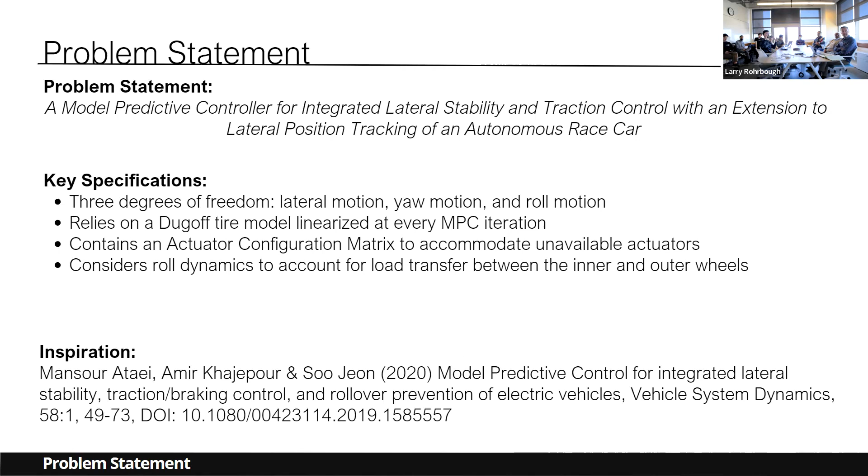Quick, before I get started, the inspiration behind this work is the paper mentioned at the bottom of the screen. In fact, it set up the backbone and then we applied the modifications that we needed for an autonomous race car and what follows.

Okay, so let me get started. First of all, why we need a controller. There are 2 cases of a vehicle not operating the way you want it to: we have a case for oversteer and a case for understeer. Understeer is when the car does not go where you want it to go because it steers less than you want it to, and oversteer is when it steers more than you want it to.

Essentially understeer is very controllable, because if you're understeering, you can hit the brakes, you can increase your steering angle, you can still, as a driver, control for it. But when a vehicle is oversteering, that's when the problems arise, because when you enter the oversteer region, it's very difficult to control the vehicle unless you're a professional race car driver. So essentially what our controller is trying to do is avoid the oversteer situations and control the understeer situations.

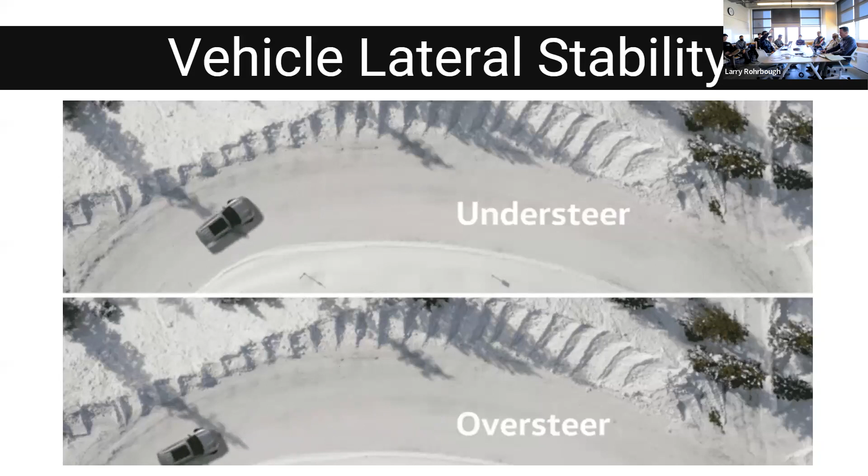In terms of literature review, the first choice is to select what kind of control scheme we're going to use, and we selected model predictive control based on 4 main reasons. The first is the need to accommodate for stability constraints.

In terms of optimal control, you could use a linear quadratic regulator. However, that would not account for keeping the vehicle within the limits of stability, so this knocked down options that cannot accommodate constraints.

The second main point is accounting for a multiple input, multiple output system. This is an autonomous racing car, a very complex system. It has all its states fed back into the system, forces, and as outputs we output steering angle. The multiple input, multiple output nature meant we cannot use conventional schemes that decouple our dynamics, such as PID control.

The third and most important point is the predictive nature of the controller, whereby based on a roughly accurate mathematical model, it can look further into the future. The time we've set is 1 or 2 seconds, and it can see if it's going to be stable at that point in time based on an input provided now. That was a very pivotal thing we were looking for.

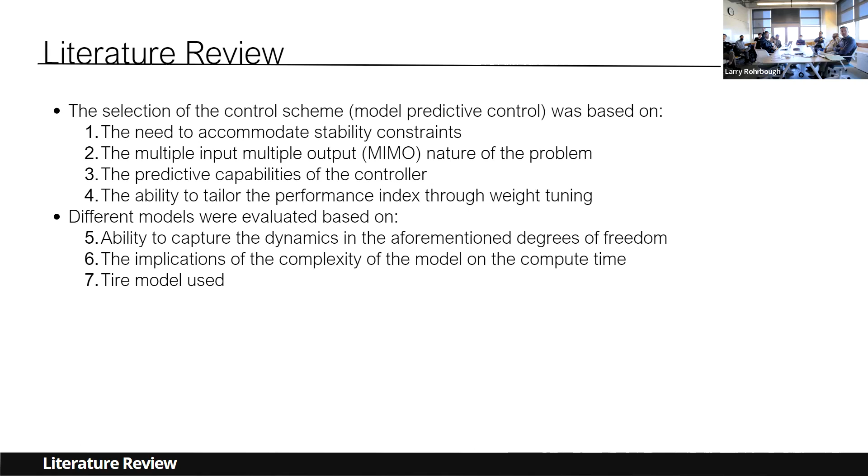Let me move into the tire model and what we ended up using. We ended up using a linearized Dugoff tire model. The main reason is if you look at the conventional Dugoff tire model, shown on the left, it captures dynamics fairly well. However, it's extremely complex, and the variable we work with, alpha, makes it extremely nonlinear.

To accommodate that problem, we linearize this model based on a hard-coded linearization function that takes us from the function on the left-hand side to a very linear, nice function of alpha on the right-hand side. We do this every 100 milliseconds, so we're not linearizing over the whole MPC horizon, but every single iteration. This accounts for the time complexity and model complexity factors of this problem.

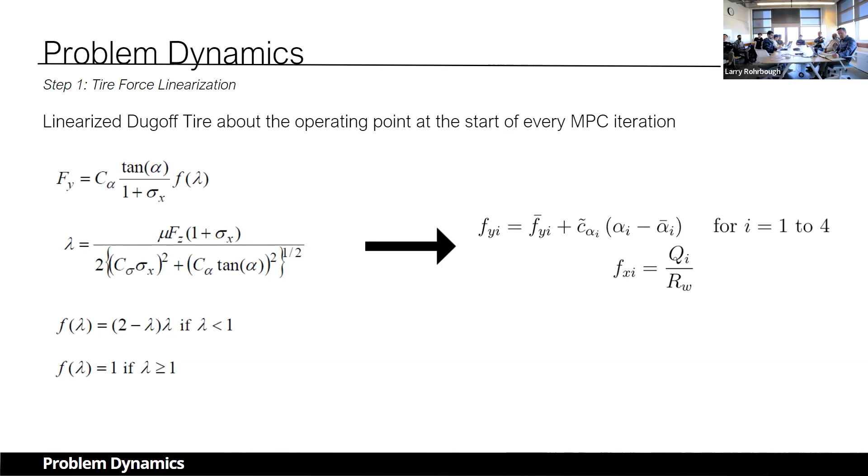That's for tire dynamics. Moving into vehicle body dynamics, these are derived from Newton's second law. It relies on in-plane motion with roll dynamics and on the stiffness and damping of the overall vehicle. The wheel dynamics are considered, as is the case for a general electric vehicle. The problem is also defined in terms of U, the change in inputs, shown as a vector at the bottom, which is the change in wheel torque and change in steering angle for every single wheel. Based on the actuator configuration matrix, we can control which of these we actually use to control the vehicle.

Ultimately, the resulting model that we get from Newton's second law is the one shown on top, where we have a state space model with input F, which are the forces in the longitudinal, the lateral, and the yaw direction.

We can also see that the model we would like to have is one where the inputs are the changes in steering angle and torque, because that's what we can actually control for. We cannot actually control for forces.

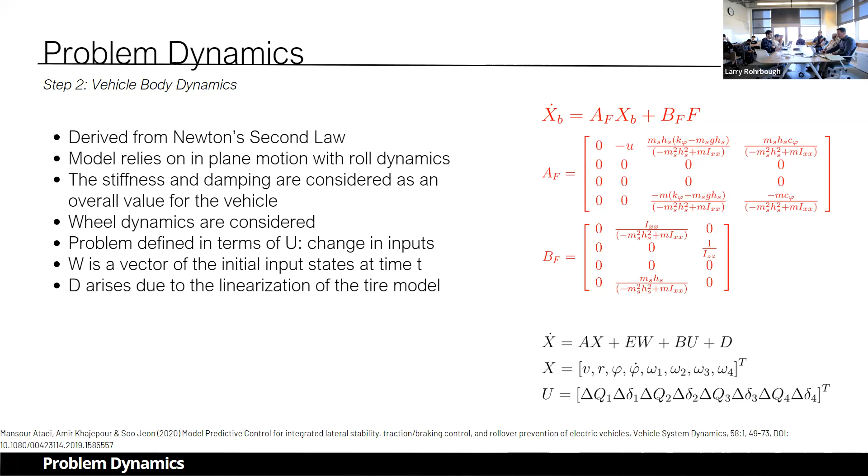So to get from the red point to the black point, we go over some math. Basically, we start with our linearized tire model, and from that we use the following equation, the relationship between the slip angle of the tire with the steering angle, the lateral velocity, and the longitudinal velocity.

a_i is defined as the distance from the center of gravity to the front axle, or the negative of the distance from the rear axle to the center of gravity, and the yaw rate. By doing this, we can move from the left-hand side to the right-hand side, where we have our tire forces in terms of our vehicle body states.

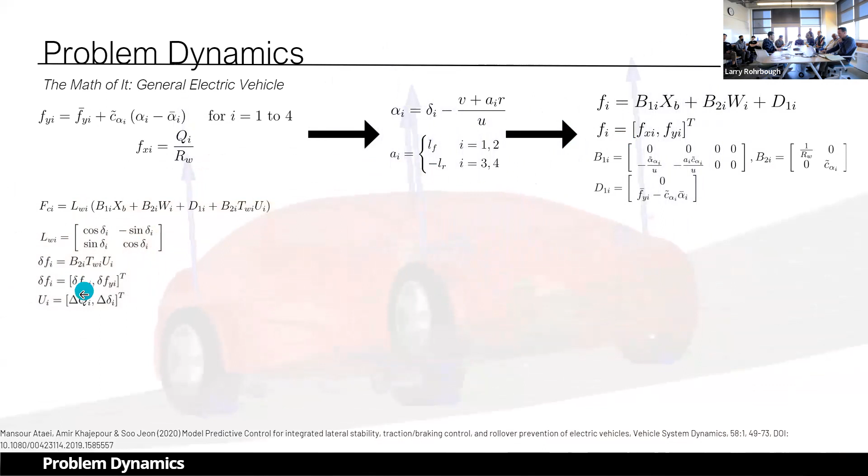After doing this, we can use a mapping matrix, LWI, which we use to move from the forces on the tire to the forces at the corners of the vehicle - essentially the rotation of the forces on the tire to the direction the vehicle is pointing in. We also add the control input as the fourth term here.

After doing this, we can take these matrices, these 2x1 vectors, and put them all on top of each other to get this simpler notation. After that, we can use the following matrix, called LC, which maps all of our forces from the corners to the center of gravity of the vehicle.

Now we have F, which is the force in the longitudinal, lateral, and yaw direction, which we wanted in the previous slide to substitute for. So now we substitute all of this backwards into the model from the previous page, and we can finally get a state space model represented in terms of our inputs.

In terms of our wheel dynamics, we can also get those from this simple equation for wheel dynamics. We do that for every wheel, and then we can concatenate those vectors on top of each other to get XW dot. After doing this, again, we take these and put them on top of each other because we like to do that.

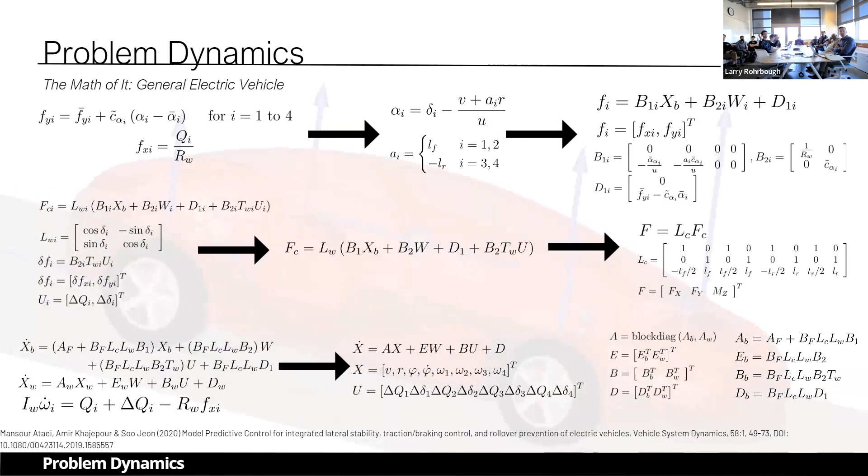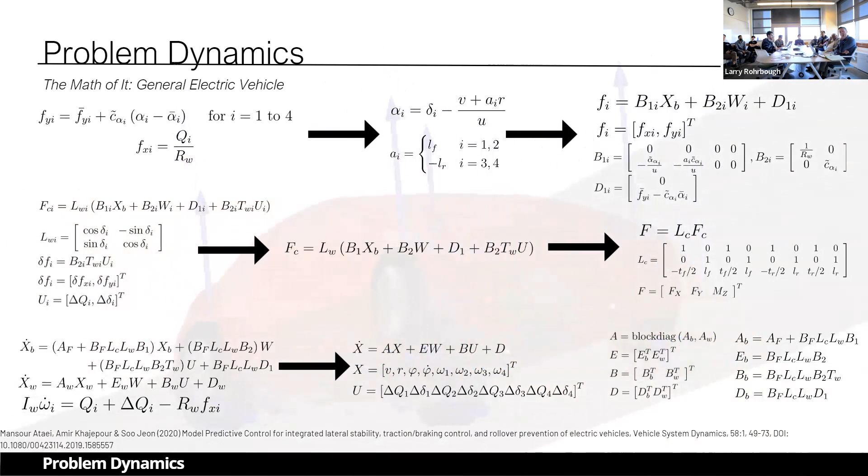And we can get the following state space model in terms of our inputs. All of the matrices shown in this model are shown on the right-hand side. They look a little complicated, but essentially they could be coded by easy matrix multiplications. Our states here are shown by this vector and our inputs are shown by the one below it.

So after being able to derive a model, now we're working a bit more with the controls - essentially, what are our constraints and what are our costs. For any vehicle, our main constraints are to try for the yaw rate to be within the limits allowed by the tire-road coefficient of friction, limiting the yaw rate within allowable bounds, because if you go beyond those, your vehicle is going to slip out of control.

We also have our rollover index constraints, which are made for the vehicle not to roll over, and the maximum allowable wheel slip ratio, essentially for the tires not to burn out in their own location. We also have the rear wheel slip angles, and the reason we care about these is the oversteer reason I mentioned earlier.

If the rear wheels slip out, that's when oversteer happens, whereas when the front wheels slip out, that's when understeer happens. So we care about the rear ones more than the front ones for stability. We also have the maximum and minimum wheel torques, based on the actuator capabilities, our friction circle constraints, our maximum steering wheel angle, again based on actuator constraints, and finally our vehicle dynamics.

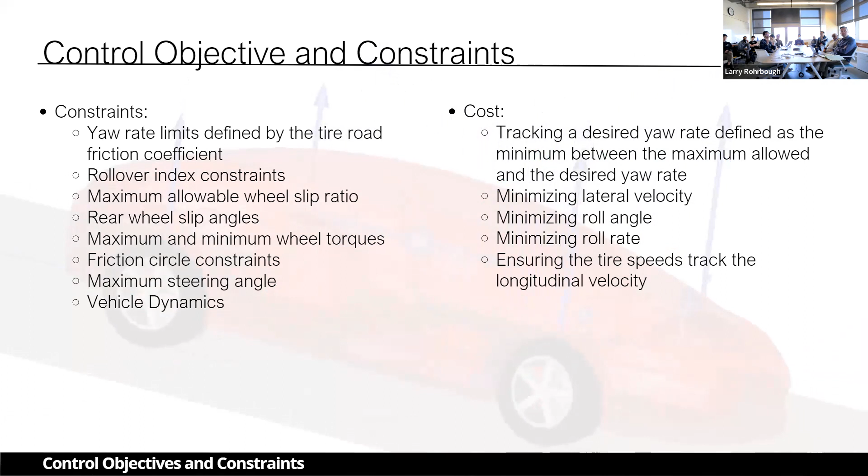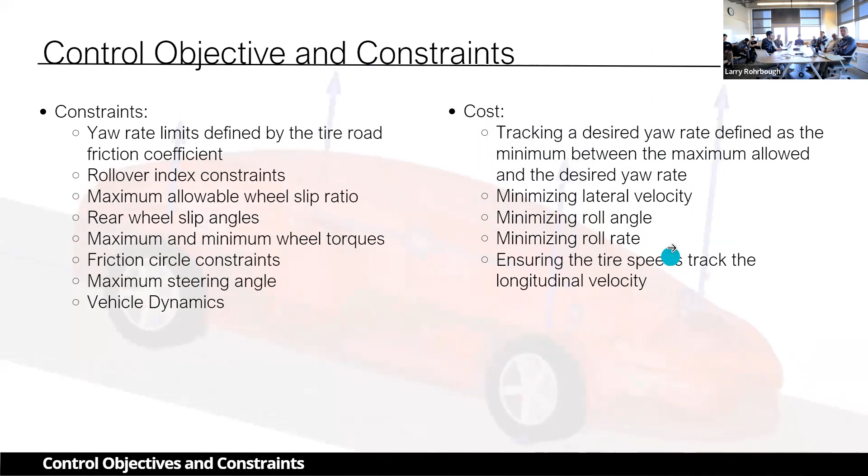In terms of costs, the first and foremost cost is to track the desired yaw rate as closely as possible. However, we also have a conflicting cost, which is minimizing the lateral velocity - essentially the vehicle slipping out of control. The remainder of the costs are of lower importance, essentially minimizing the roll angle, roll rate, and ensuring the tire speeds track the longitudinal velocity.

At this point, the simulator we were using ran out, it was sunsetted, so we had nowhere to test this. So we had to develop a makeshift, low fidelity simulator in order to run our controller on, test it, see if it works with model error and so on. What we did is essentially use a bicycle model simulator that we made based on the following equations for the tire forces.

We also updated the torque and steering angles based on the optimal values from the previous MPC iteration. We used perfect model knowledge to start with, and then we started applying some noise to see if the controller still functions when it's getting wrong inputs.

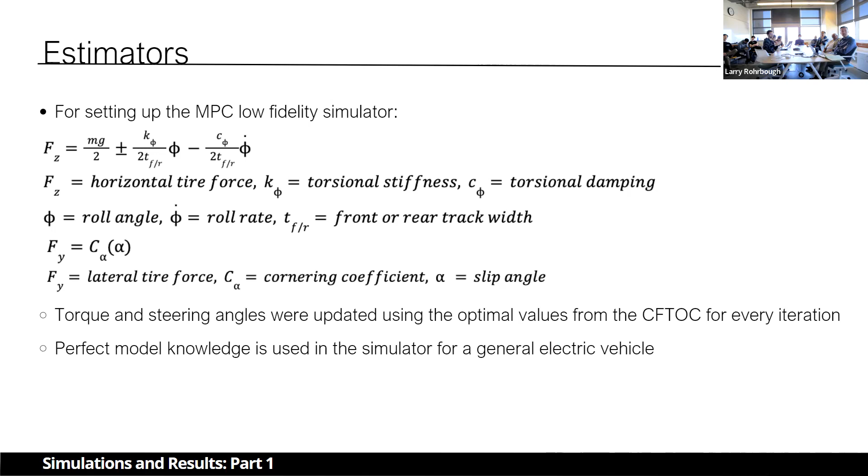The results were pretty good. We were operating on an MPC horizon of 10 steps and a sampling time of 0.1 seconds, and we simulated the problem for 25 seconds. Here we were running with a vehicle speed of 80 kilometers per hour at a steering angle of 0.15 radians. The parameters used here were those of a Mercedes E-Class, just to provide preliminary testing.

As you can see, we can almost track the yaw rate perfectly. The reason we don't go up to that value is because this is beyond the stability limits as defined by the tire road coefficient of friction and the vehicle parameters.

In this case, the only available actuator we were using was the wheel motors. So we assumed that, let's say, the steering wheel is broken or something. Can the vehicle actually regulate itself? Indeed, we can see that it does that through controlling the wheel speeds at the individual wheels. The left wheels are slower than the right wheels, which means that the vehicle pivots to the left-hand side.

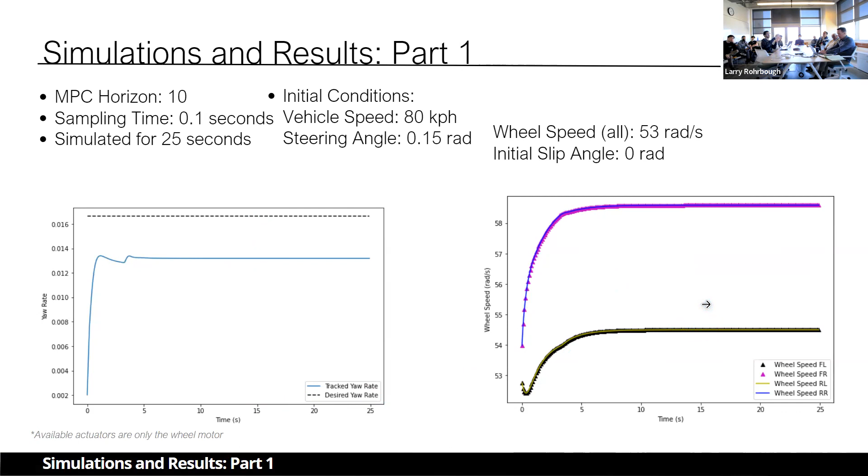Okay, so that was it for the general problem. Now, what do we change when we want to work with an autonomous racing car? The first point we need to change is including the road banking angle, because when operating, especially on an oval, our banking angles go up to like 20 degrees. So we need to account for that, and we need to have that inside our model.

The second point is stiffness and damping. We wanted to consider those for the 4 shock absorbers instead of for the whole vehicle. The reason for that is because that's what we have access to based on previous experimental testing, so we wanted to use those instead of having to run new experiments.

Just for clarification, given the nature of the car we're using here, the actuator configuration matrix is selected such that it turns off the individual wheel speed control, and it only activates control for the front wheel steering angle, making sure that the inner and the outer wheel have the same steering angle, because that's essentially the case we're working with.

All right, let me move into a little bit of detail. Sometimes with race cars, you do go into oversteer conditions. As you can see in this case, in 2012 I believe, Michael Schumacher in Monaco, the vehicle actually skids out of control, but the race car driver is still able to control it and still able to maintain, to go back to a stable region despite leaving it. So essentially, this is the kind of performance we're looking for in terms of oversteer conditions if the vehicle were ever to go into those.

Based on that, we had to change our control objectives and constraints a little bit. Namely, the grayed out ones are the ones that were removed from the previous case, and those are essentially accounting for rollover, because that doesn't matter in the case of a race car—it's not going to roll over.

I could say with fair confidence that the slip ratios are no longer relevant, so anything related to longitudinal dynamics is removed. This being a purely lateral controller, in terms of costs, we had to drop the costs a lot on roll angle and roll rate for the reasons I mentioned earlier. And we had to place a very high cost on tracking the lateral position because now that's our main concern, so that we do not run into walls, into other cars, and so on.

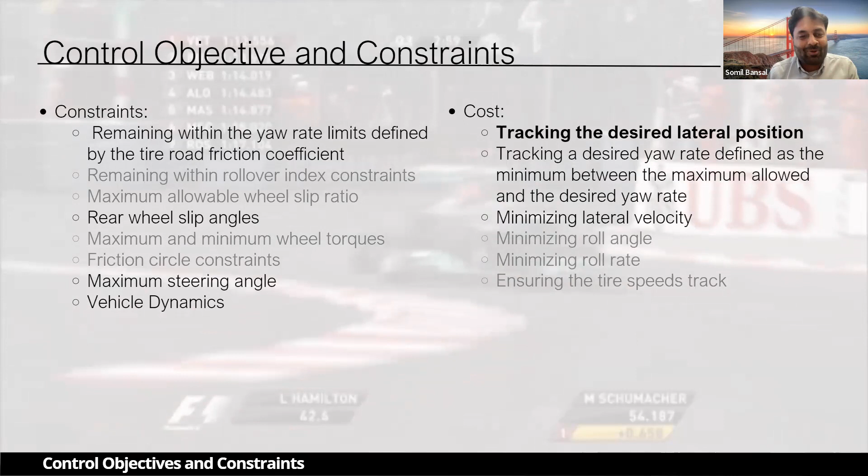Can I interrupt and ask a quick question? So to me, it seems like the relative weight between these cost terms will depend heavily on exactly what scenario you are handling at the moment. Meaning, are you near oversteer conditions versus just driving on a relatively straight curve. In my experience working with multi-objective MPC problems in the past, that significantly affects the performance of these algorithms. Is that something you observe in your work, and if so, what general strategies does your team use to handle those situations?

That's actually an excellent question. As of recently, we were able to spot a correlation between how big the lateral error is and how the controller performs. At bigger lateral errors, the car tries aggressively to steer into position, and that's when it starts to oversteer. So the approach we've been using is to have a dynamically changing weight in the cost function for these first two terms especially, that varies based on how close you are to the checkpoint. The farther you are from the checkpoint, the more you drop this weight, and the reason for that is to avoid going into an oversteer condition.

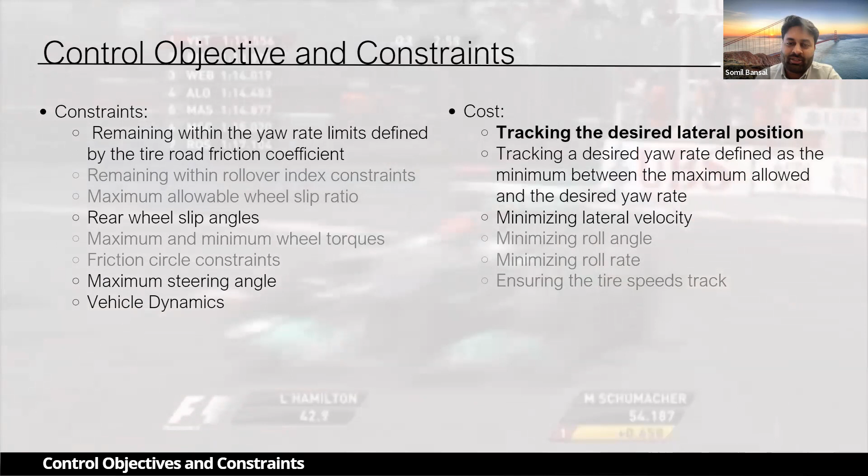Interesting, yeah, that's very exciting. I think the one thing I was thinking on that front, we can discuss once you're done with the presentation, is that could be another really good use case of learning in this system. Absolutely, so just about the learning story there, and I haven't probably covered it.

They say that these drivers, when they drive these courses before the trials, a lot of what they learn is really this game of inches about exactly where they learn the optimal line for taking these curves. And I presume that's sort of the learning part for the way you balance the propensity to not get into an oversteer, because apparently I've heard it said that after the race is done, they take a look at where the tire marks are, and the tire marks are always within a few inches—nobody deviates, because if you do, you're basically dead, somebody overtakes you. So is that a plain thing to bring learning to bear on? I think it would be a very interesting application, because what I'm trying to do at the moment is emulate something that can get as close to an optimal solution as possible, but I think the opportunities for learning here are, well, I think that's what Somil would do—he'd sit on top of this.

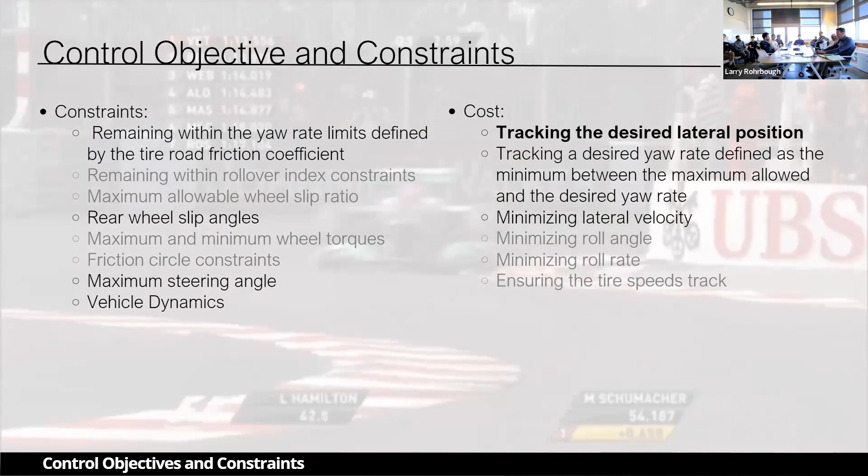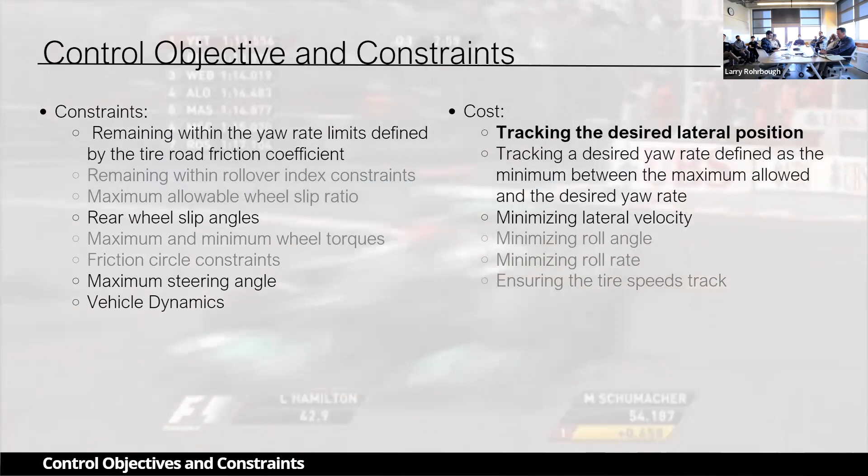That's to put words in your head, to get the exact line for the... Absolutely, no, definitely, yeah, so I don't want to derail, but we can chat offline. I think that could be a really good use case. Absolutely, I agree, I would love to chat about this after this presentation. Okay, lovely, any other questions? All right, good, I'll go through then, I guess.

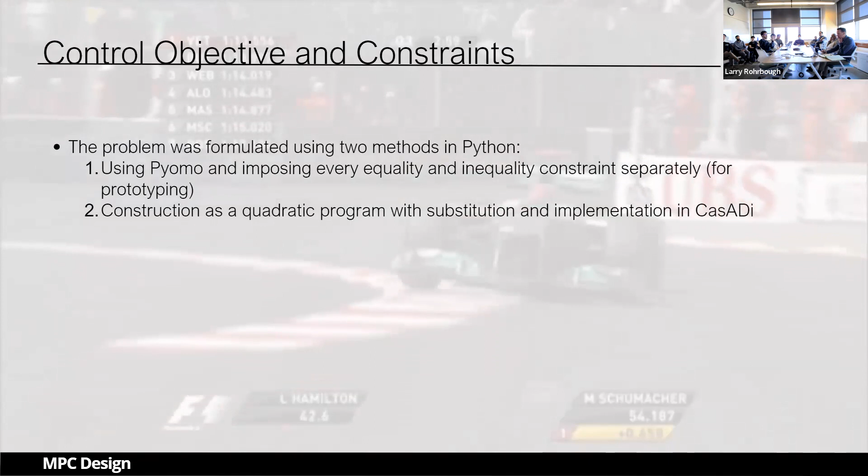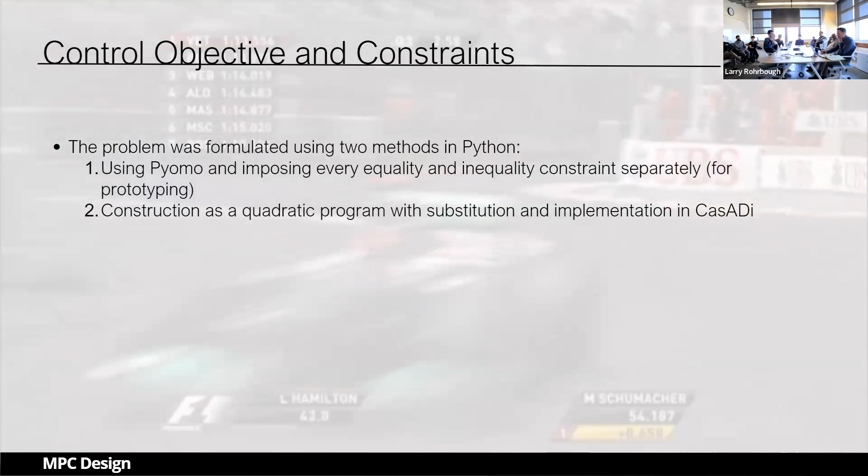In terms of now, these are the objectives of the problem. In terms of formulating it to make sure it's as quick as possible, we had two kinds of formulations, both made in Python. The first one was essentially using Pyomo and imposing every equality and inequality constraint separately, done for prototyping. This is not the most efficient algorithm, but it's the quickest to make, so we made it preliminarily to test this MPC and make sure it conceptually runs and works. After that, we were able to construct this as a quadratically constrained quadratic program with substitution and implementation in CasADi, with a vision to translate this into C++ to run it even quicker in the future.

As of currently, it's been running at a pretty decent speed. It essentially has one big matrix constraint and one quadratic cost function.

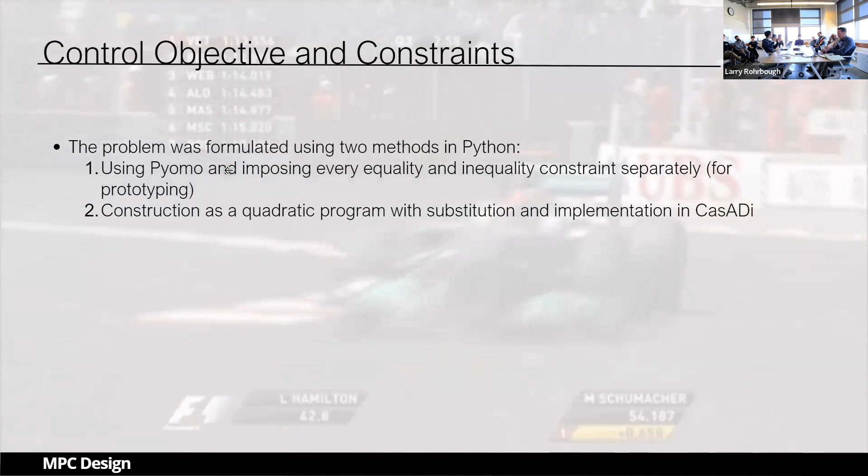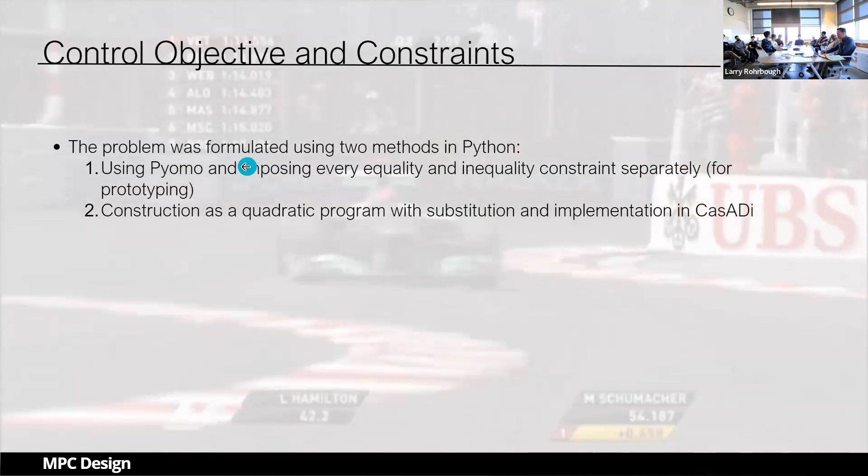Can you elaborate on what Pyomo and CasADi are? They're essentially optimization environments. Pyomo is a really slow one that's used by beginners, so you can put everything in there easily and it's easy to formulate. CasADi is a bit different - it's quadratic optimization, essentially a quadratically constrained quadratic program, so it's really quick to work with. CasADi has some quirks in terms of how you formulate the problem to make it run quickly, but it has much quicker solvers. That's why we shifted into this one.

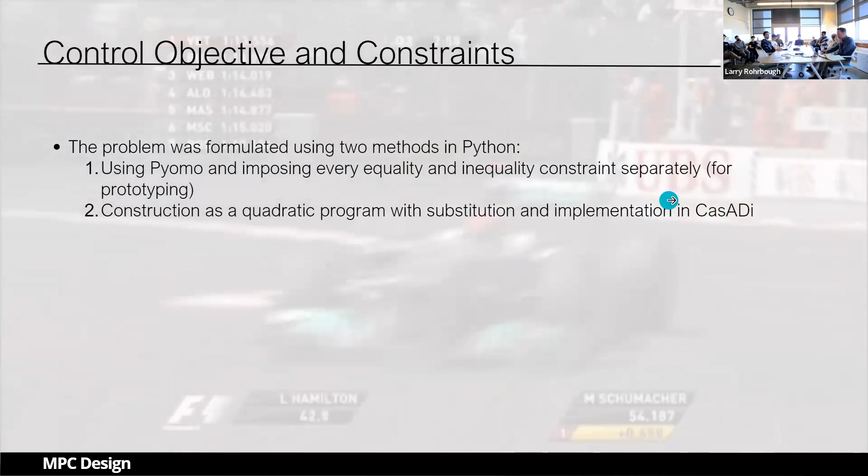And if I understand correctly, the MPC problem we're trying to solve, is that more like a robust MPC problem? Because you have both control and there was some D and W, which I'm assuming were some sort of noise or disturbance. Is that how we're modeling it?

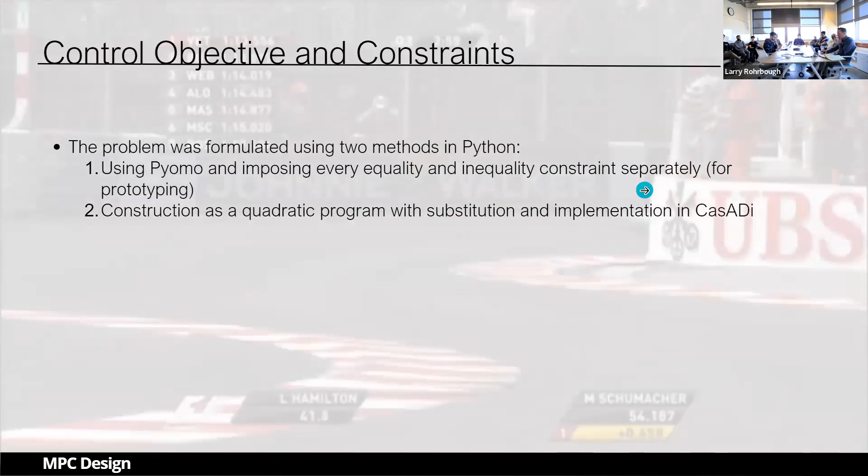Got it, yeah, sorry, I got confused by those notations. Those are typically used for noise and disturbance in control theory. No noise and disturbance in this case. Thank you for clarifying.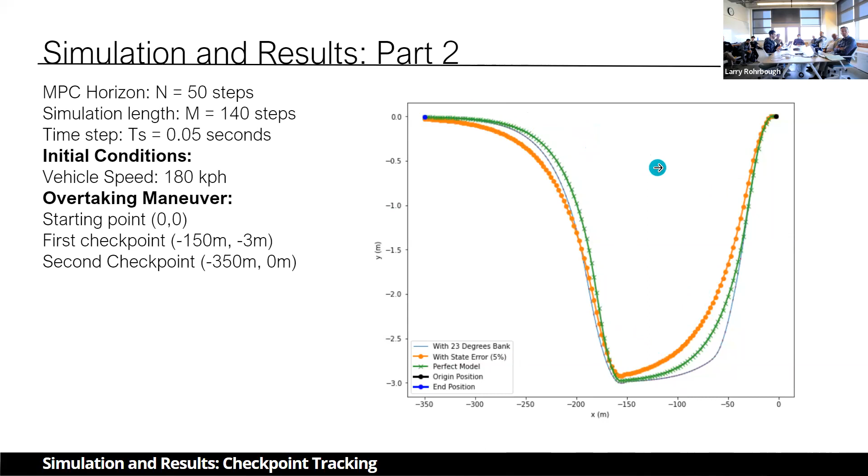We tried it with a banking angle with 5% state error in terms of noise, and we also tried it with a perfect model. In all cases, you can see the MPC is able to perform the moving out and then moving back in at the proper angles in order to stay in line. This is on a straight, which is where most of our overtakes tend to take place, which was pretty promising at this point. However, as of recently, we were able to gain access to a high fidelity simulator.

And this is not a high - it's in a couple slides, I'll get there, sorry, got excited. In terms of tire loads, when we have a banking angle we can see the load shift into the inner tires, which is kind of expected. In terms of the other cases with state error, and in the case of a perfect model, we can see the load shift between the left and right tires.

However, there are some oscillations in the perfect model case. We consider them insignificant as they have very low peaks, but the MPC could be further tuned in order to remove these.

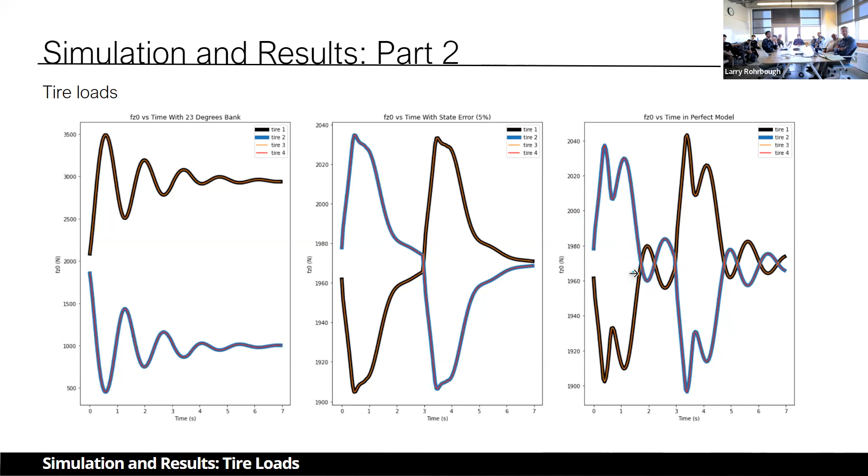Last point is that in terms of tire slip angles, we wanted to check those to make sure the MPC is always feasible, because it's running for a long time so we can't go through every line of code. We can clearly see the MPC remains within the stability limits for its rear wheel and front wheel slip angles, which is very promising since we're running at higher speeds, like 180 kilometers per hour.

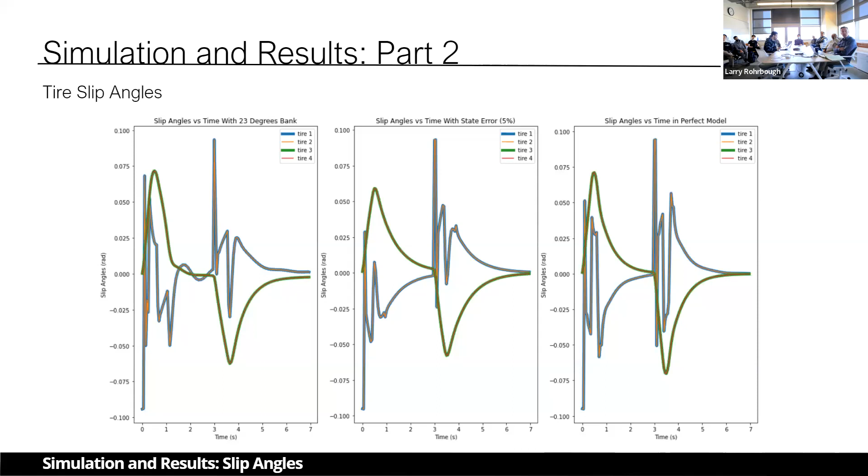All right, so this is the part I was excited for. Now, this is not a very high quality video since it's simulated at low speeds, because you're actually going to run this at higher speeds. This is a high fidelity simulator, so it's not very representative of what we're going to be running in real life. That's why we started with the lower speeds, just to capture bugs inside the MPC essentially.

Okay, let's see, is this one? Oops. Is it because of this Zoom and your player? I think that's what's happening, because it wasn't happening before. Yeah, that's it. Okay, there we go. Does it work again? No, you'll have to see.

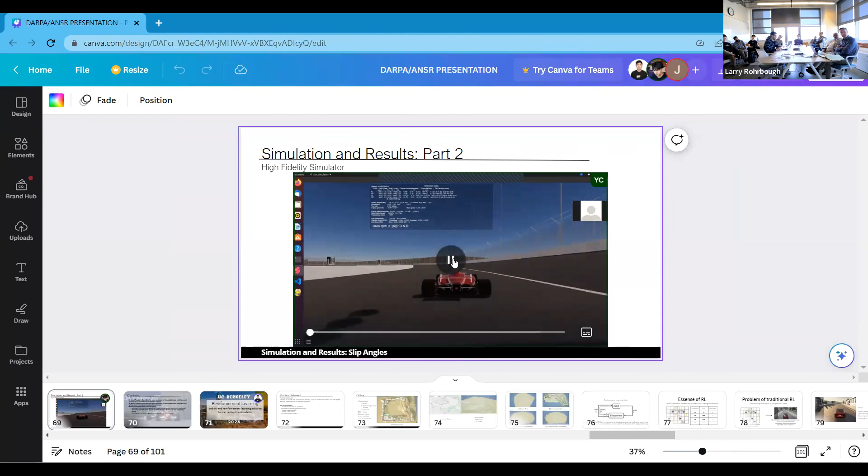So essentially, this video has horrible quality, I'm sorry about that, but it shows how the vehicle can actually track the racing line. Here we were operating with a lateral error of about 5 centimeters, which was very promising. This is around the Las Vegas track. Still pending further tuning where we can operate at all kinds of speeds, all kinds of places, but nonetheless it's been very promising to this end.

The take-home message is that we have a working system.

What can you change in the simulator as far as the environment configuration? Track - yeah, we can change the track.

Just tell us what that means - can you change the surface characteristics? Is the track just like an open track with nothing else on it? Yes, so we can run it with a track with another car on it. We can change the tracks in terms of all the surface options, everything like that - we can modify all of those. We can change the actual track layout. There's a lot of flexibility in terms of what you can do on this simulator.

But for the simulations you've done so far, you've set it to some particular thing. Yeah, we've been running with a single car and minimum grip - essentially the worst case scenario in terms of grip, just one vehicle, and testing that out.

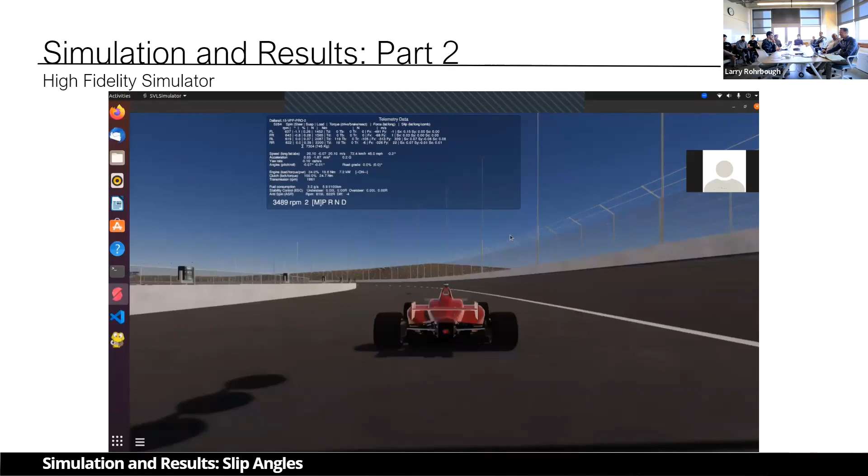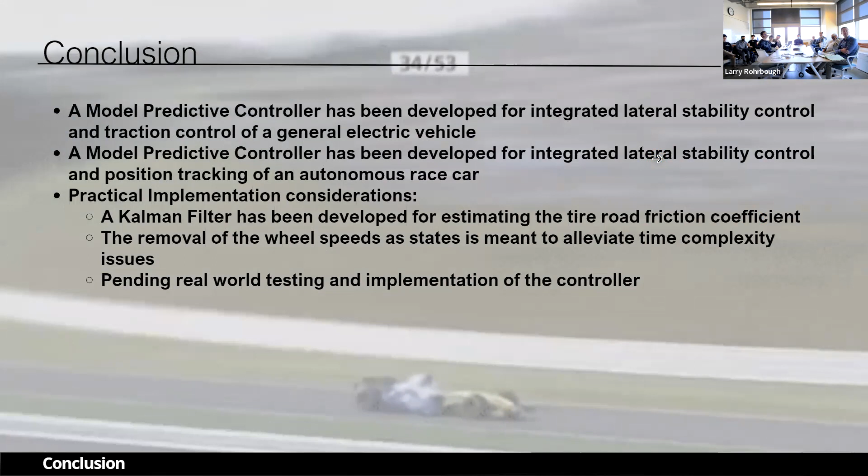Okay, let me hop into some final quick conclusions. What we have right now is a model-predictive controller for a general electric vehicle and another one for an autonomous race car - essentially the same one, but with small tweaks in each. Some practical implementation considerations we've made: we developed a Kalman filter that can estimate tire friction coefficient, and this is more for real-time implementation in actual vehicles.

Hey, so that's great - wonderful presentation, don't get me wrong. But I think one of the things we were charged with doing in this program is to develop the software toolkit to make it less painful. That's why Sanjit's asking these questions. So what can we do with the tools that you have developed?

The critical part is the simulator - without a better simulator, you need one. So Carla is not going to be enough. And why is it? This will be a stupid question, but - Carla itself does not have a customized vehicle dynamics model.

But this simulator is what? LGSVL - oh, from LG. What is LGSVL? It's LG Silicon Valley Lab. We worked with them in the past - we actually have our tools interfaced to a previous version of LGSVL. But they sunset that project. Our tools are interfaced to LGSVL, and Eddie was involved in that. They laid off the entire team last year. LGSVL essentially closed down that effort.

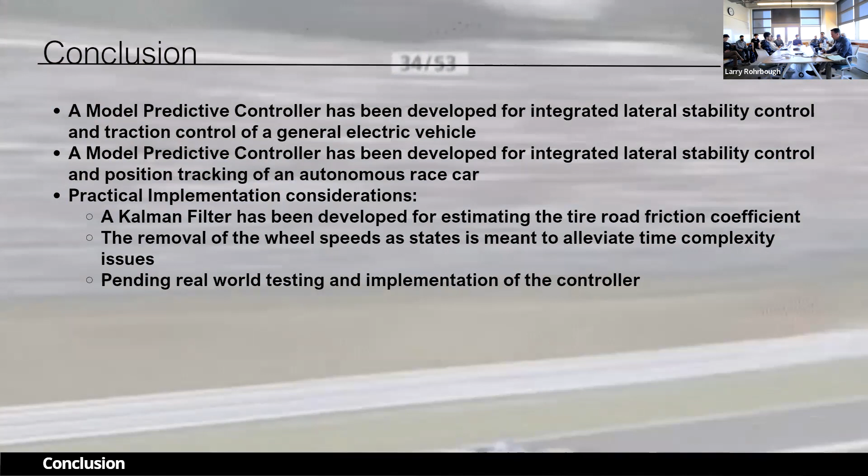This is Alan's punchline: whatever we can do so that it's maximally painless, since they only get the car a few weeks before the race. You want to design minimum tweaking that they can do there. That's the difference between winning and losing. So if our design tools can really cut down on that last minute tweaking.

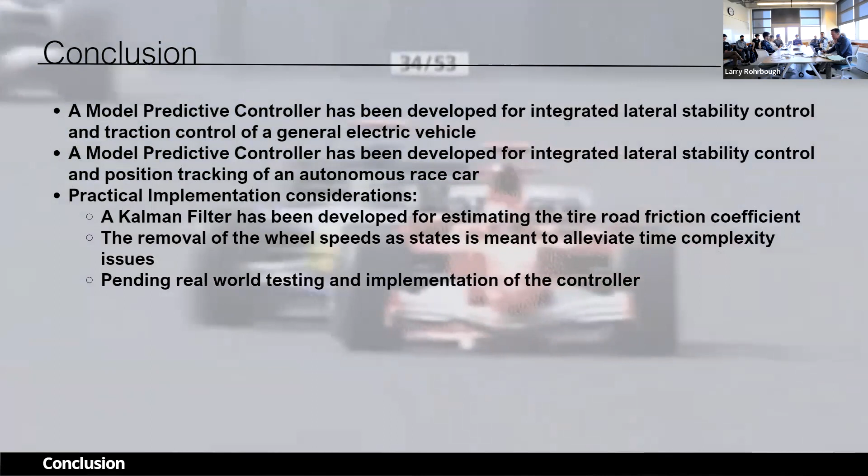If we provide a tool chain, and in terms of conceptual matters, that's the goal of verification - they call that the validation phase. So it's the verification to take the pressure off the validation. Using the verifier to do, well, not only design tuning, but also experiment design for the few weeks that you have on the track.

You want to be able to run the right tests. So the verifier goes this far, but now you test it on these other scenarios and then tweak it and you're on your own. So I think if we did all of that, it really feeds into the development and it is their single largest need.

They want to do it as much as possible - doing the virtual stuff is really the single biggest need. And then we have five other teams to really show whether the simulation works or not.

Now, Shankar, I want to give you some bad news. For Monza, it's not several days, it's several nights. Because the Monza track is so expensive, we don't even get full days access.

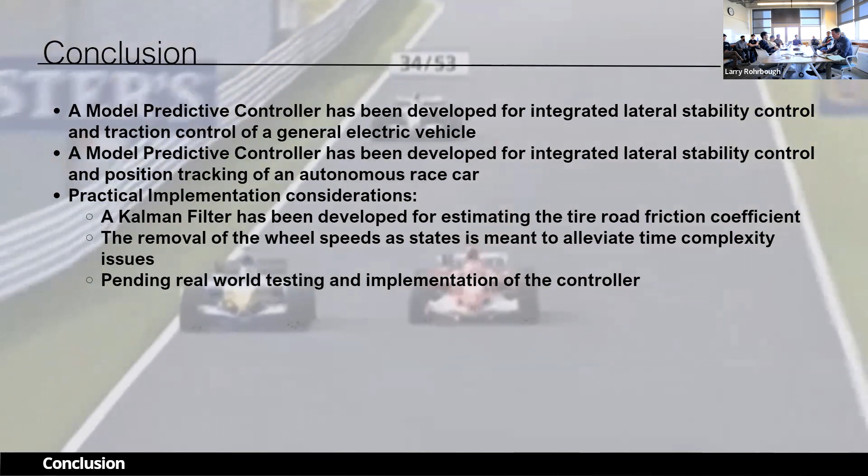In Vegas, these people spend Christmas and New Year over there, but it's a good experience because they get like a week. But for Monza, it's going to be a few nights, we don't even get a full day. When is that happening? June 16th to 17th and 18th. Before June 16th to 18th, we only get sporadic few nights to test the track.

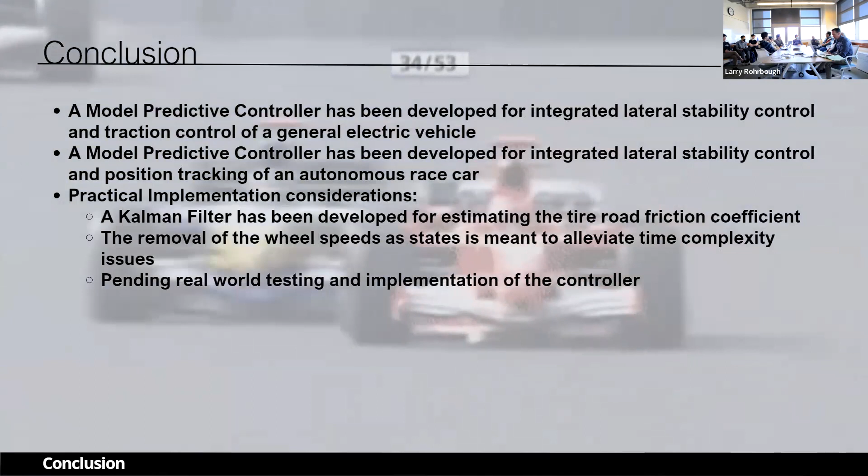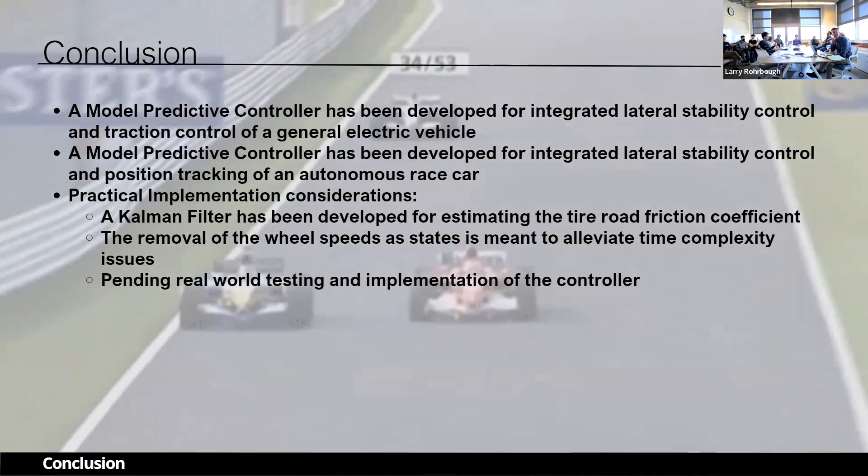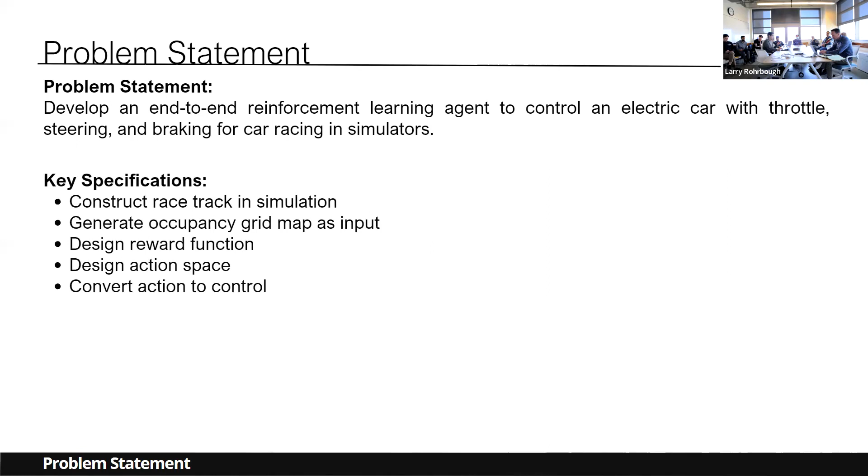We want to develop an end-to-end reinforcement learning agent to control an electric car with throttle, steering, and braking for car racing in the simulator. Our main contribution is to construct a racetrack in the simulator, generate an occupancy grid map as input, design the reward function and action space, and convert action to control.

To begin with, since for CARLA there is no car racing map in the simulator, so we build a map. We also develop the vehicle dynamic model and put sensors on the map and on the car. You can see on the right, it is our first map, which is the Berkeley minor map.

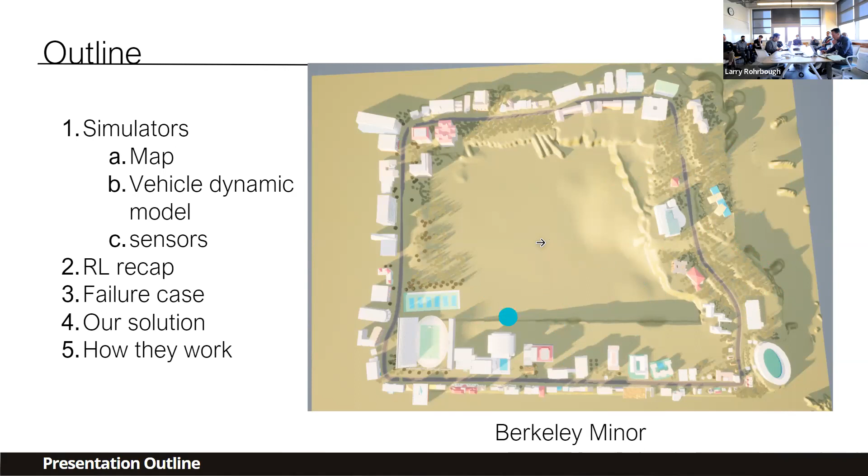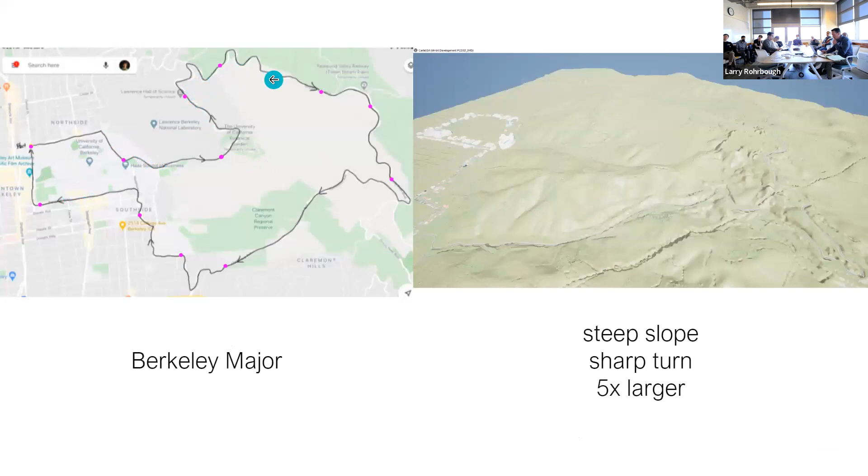It consists of four roads around Berkeley, which is the first map we did train the race on. Then we developed the second map, which is the Berkeley major map. You can see on the left, it is the Berkeley major map; however, on the right, it goes up to the mountain with steep slope, sharp turns, and is 5 times larger.

And then we have four racetracks built in the simulator, which are EV Grand Prix, Monza Racetrack, Texas Motor Speedway, and Las Vegas Motor Speedway.

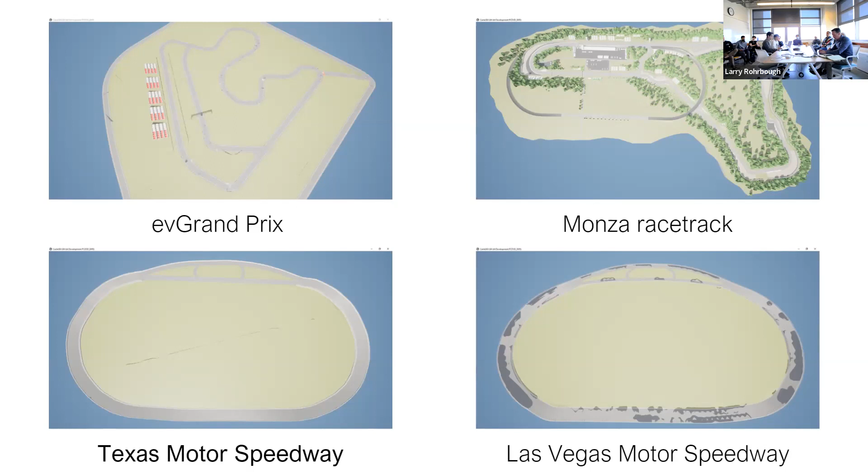So for Monza, because we cannot go there - Shankar, I want to add here - we just go to Google Maps and get the GPS coordinates as raw as possible, that's the best we can do. We approximate Monza as flat. We know there are banking angles and they are not at the same height, but that's the best we can do. We grab the GPS coordinates on a high resolution Google Map and build one, but it's completely flat, it's not a real model. It's just an approach to get a similar one.

So after we have the simulator, we are going to use reinforcement learning. Here is the recap for that.

In RL, an agent reacts within the environment through actions. Actions can be like steering and braking of the vehicle, and the environment can be an actual race car or it can be put in the simulator. Each time an agent performs an action, it gets a reward and a state returned by the environment. The state can be something that the camera captures on the race car, and the reward is a logic that we previously defined based on the state we receive.

In theory, reinforcement learning is the only field in machine learning that can achieve real intelligent systems that learn to make their own decisions without human supervision. However, this is not possible today. But let's continue.

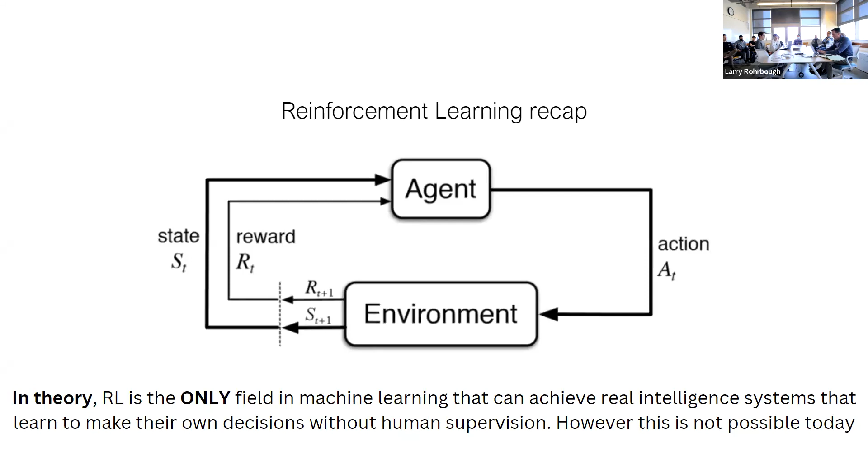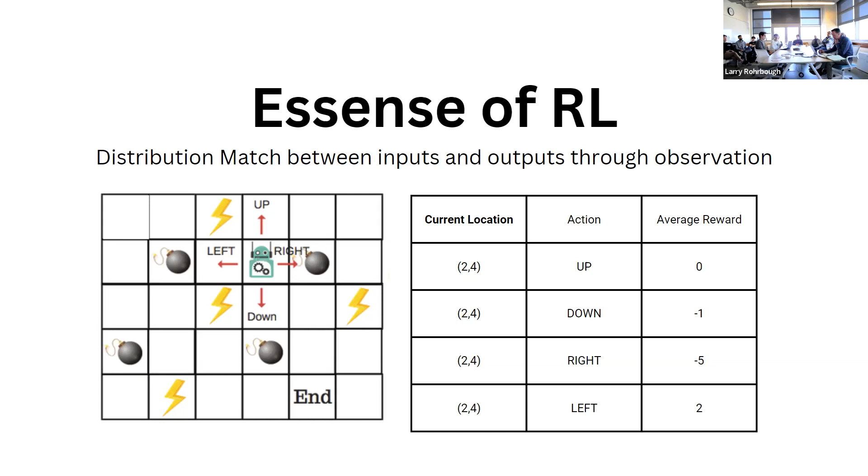The essence of RL is basically recording down a table. Let's say this robot can either go left, up, down, or right in this little grid map. Each time it receives electricity, it gets a positive reward, and each time it goes to the bomb, it receives a negative reward. So it's encouraged to get electricity and try to avoid bombs. Through its experience exploring this grid map, it will record the average reward of each action in each different location. So this is a very basic model of how traditional reinforcement learning works.

However, if we extend this training scenario to our Carla map, the action space and the state space is just too big. We receive a 24 by 24 pixel, 9 channel continuous image as an input - that's our occupancy grid map. And then we're outputting 2 continuous actions: steering, braking, and throttling. So for each continuous axis we have exponential increase in complexity, and it's impossible for the car to experience every possible occupancy map layout. So it has to generalize, so that when it sees enough of some occupancy grid maps, we're hoping that it will recognize pixels as the edge of the roads that it cannot drive through.

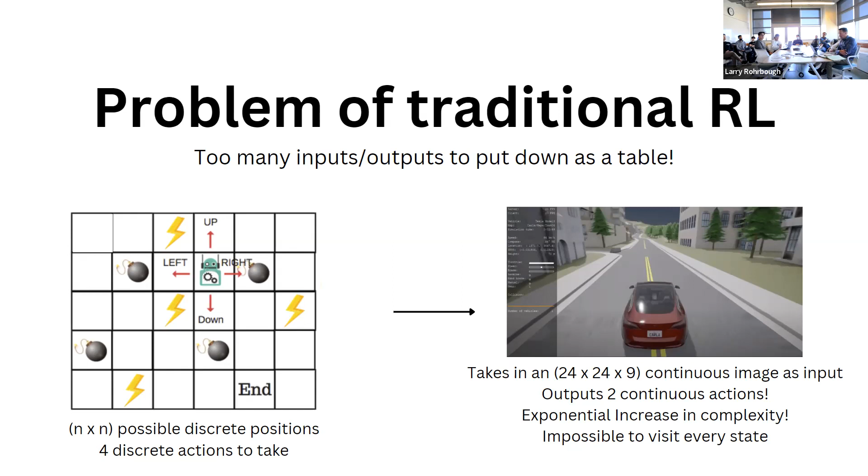For the people who have already taken the reinforcement learning class, I think teaching a car to drive with reinforcement learning sounds easy. However, we spent 1 year overcoming failures for a reasonable convergence rate. So here I will introduce some of the failure cases.

For the observation design, since the observation in the last page was too large, we make an occupancy grid map which consists of obstacles, vehicles, and other information we get from the simulator. And since there is only 1 reward at the end, which is the score for how long you finish the lap, we manually add a reward line on the second column to show the reward that we'll get when it crosses that line. Since it cannot read its own speed, we use 4 consecutive frames for the model to learn the speed of the car.

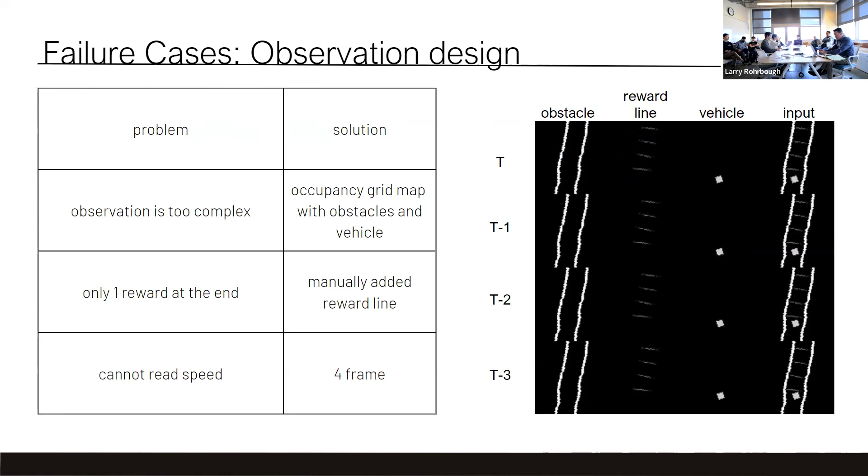Question: explain what you mean by manually add reward line? Answer: those reward lines are not provided by the simulator, but we manually design the reward line for the car to follow. So by reward line we just mean like waypoints - when the vehicle passes one of the reward lines, it gets a reward.

However, for that version, the occupancy grid map was still not perfect. At the beginning, we designed a Gaussian reward line, shown at the top, to encourage the car to drive in the middle of the road. So if the car crosses the reward line in the middle, it gets a higher reward. However, after training, we found that the car drives better in the early stage, but it's harder for the car to find the racing line later on. So we changed that back to a uniform reward line.

We also found that the simulation FPS was too low, so we decreased the size from 84 by 84 to 24 by 24. But this caused another problem: there wasn't enough vision to see the upcoming turn in the near future. So we created a larger view with 1 time, 2 times, 4 times, and 8 times the map, and resized it to 24 by 24 so that the car can see what is going on in the future.

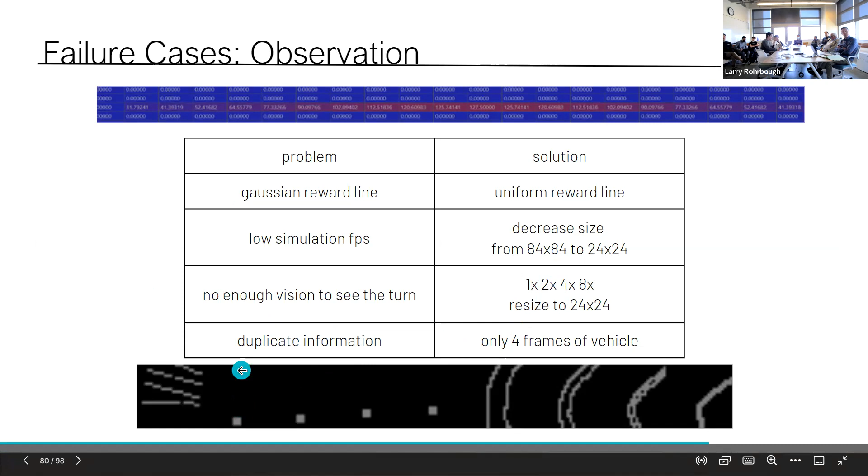Also you can see that for this version, there is some duplicated information. So we only let the vehicle frame have 4 frames. At the end, we have only 9 channels for the input of the racing movement.

After we're done with the input, we deal with the behavior of the car. We might find that the car is stalling because it is pressing the brake so hard for a long time, so we decide to terminate that when the stalling happens.

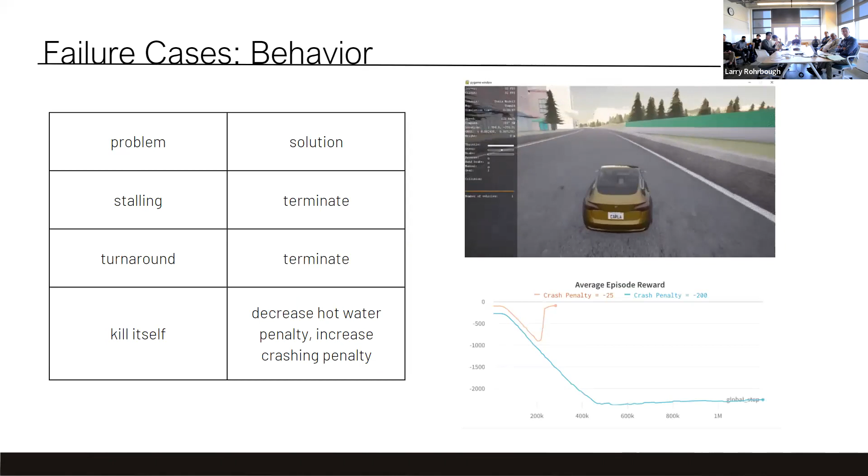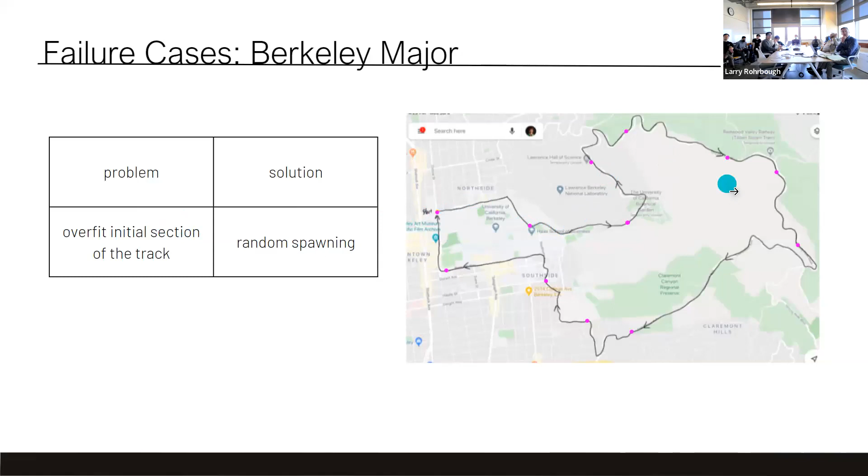Since it is a more complex map with steep slopes, a larger map, and sharp turns, the car learns to overfit the initial section of the track while it cannot finish the lap. So we create many random spawning points for the car to learn all the different changes of the road.

Also, in the Berkeley major map, there are many steep slopes, so the car might fly in the air when it is driving so fast.

By adding the height to the input map, you can see here it is not just 0 or 1 — the height is encoded in the height map. So after putting the height in the occupancy grid map, the car learns to drive straight when there is a large change in the slope.

You just trained a stunt driver. Yeah, so now the car can drive land easily.

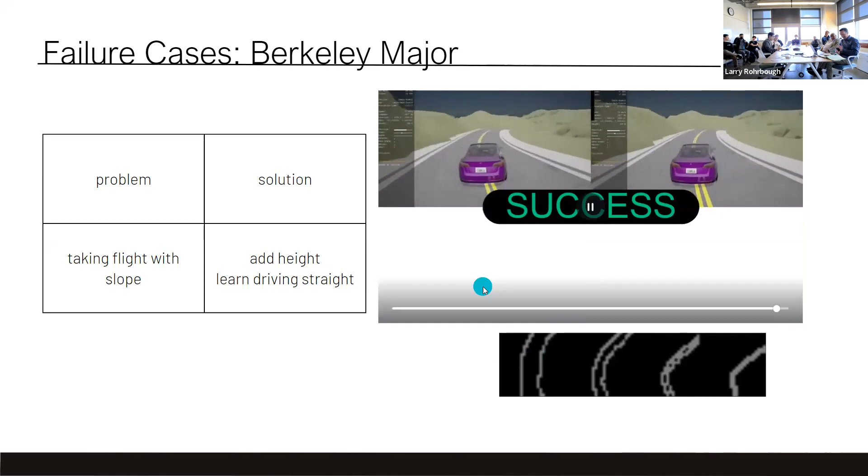Can I ask two very quick questions? One is, could you tell me which RL algorithm you're using? Oh, we are using PPO now. Which one? Yeah, so PPO. Do you have a slide? Yes, we have slides, let's talk about that later.

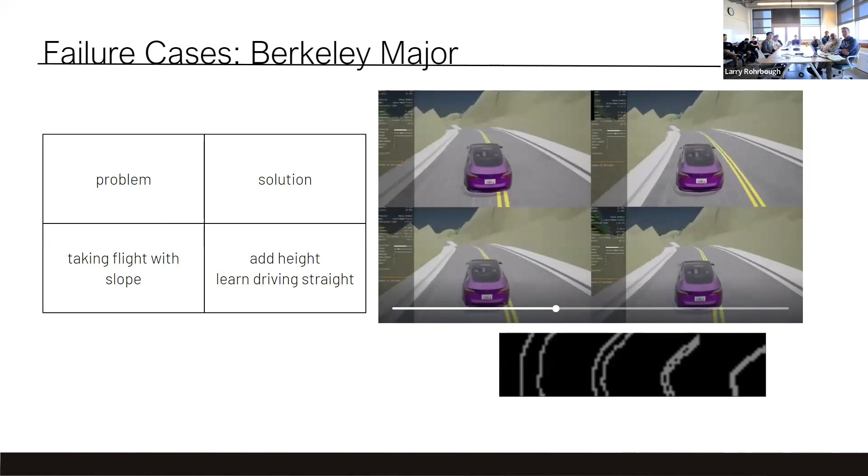So what was that flying thing? Was the car out of control? Because if you drive around Grizzly Peak there are bumps, so you were in the air. These are not the things a Tesla engineer would worry about, because highways aren't allowed to have those bumps, but in Berkeley, you have them. So if you just apply the algorithm from reinforcement learning courses, you're going to get a flying car. That's the problem.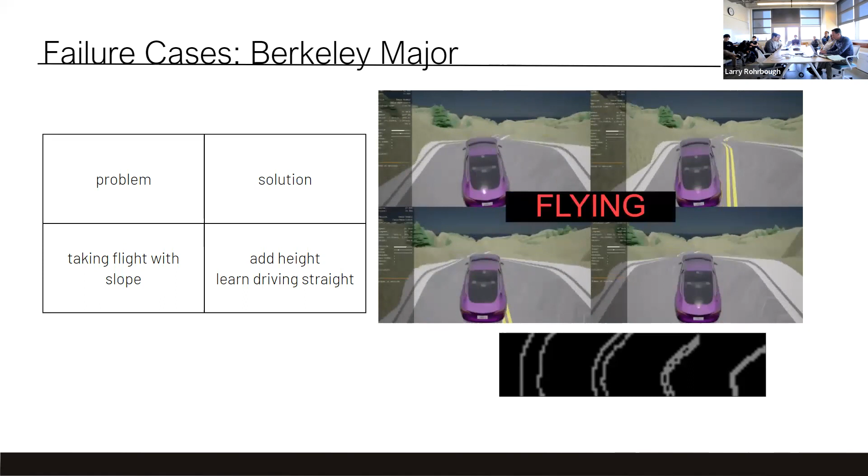My second quick question is, are we training and testing in the same environment? That's what it seems, but I just wanted to confirm. Yes. So overfitting is an option to RL in this case? Yes, but we don't want overfitting in the early stage. Got it.

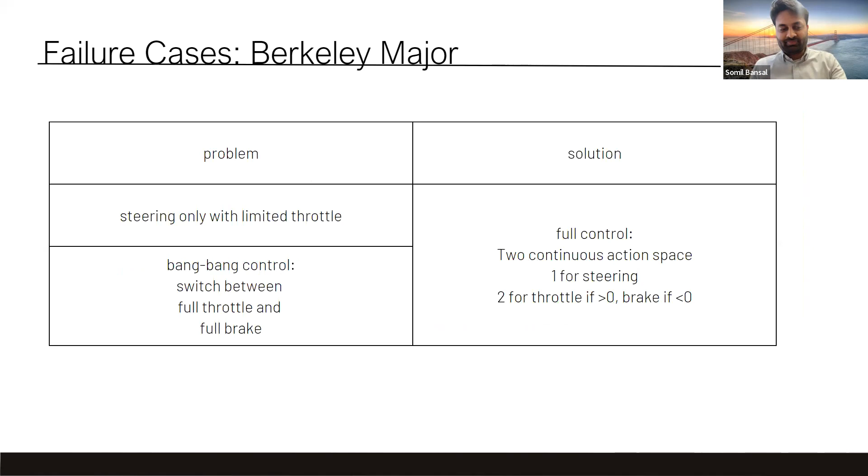And also we found that we choose different models to convert the action space into control. For example, at the beginning, we tested only letting the model control the steer, while the throttle was fixed at 0.7.

We also tried bang-bang control, which switches between full throttle and full brake, so the agent can control two different actions. However, for bang-bang control, there's a problem: the output of PPO is continuous, but bang-bang control is more like a binary thing, so the model has a difficult time learning it.

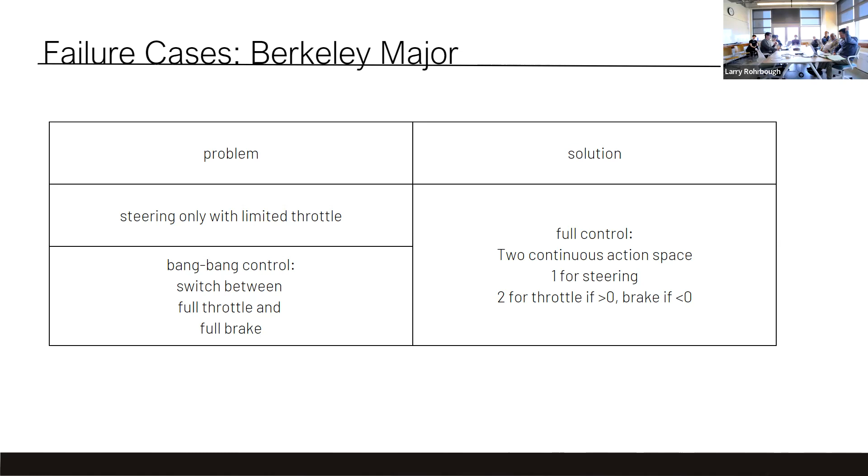At the end, we changed back to full control, which has two continuous action spaces: one for steering, and the second for throttle if it is larger than 0, and brake if it is smaller than 0.

So for the whole structure: first the simulator gives out the information we need to build an occupancy map. Second, we take this as input for feature extraction. Third, after feature extraction, we feed it into the RL agent, which is a PPO agent, to generate the action. We then convert the action to the control that feeds back into the simulator.

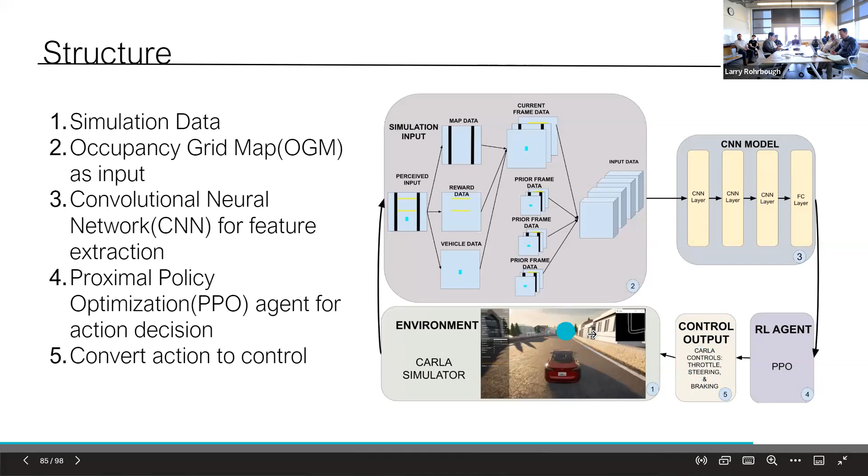So here is the stable steering only version. You can see the model can complete the Berkeley minor map in 1 million steps, but it can drive much better in 18 million steps with less wobbling. However, when the car learns to speed up, it needs to learn how to control the wobble every time it increases the speed. In the future, we are trying to use the neuro symbolic method to help the car learn the relationship between wobbling and speed.

You can see on the bottom right, that is the finishing time.

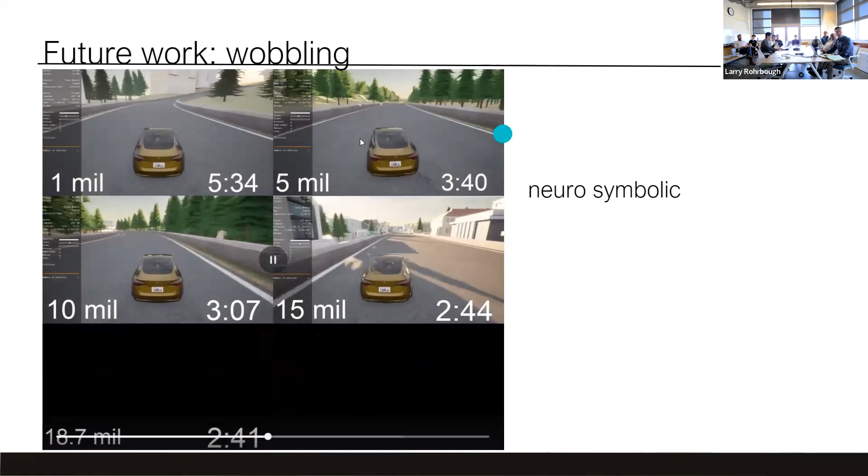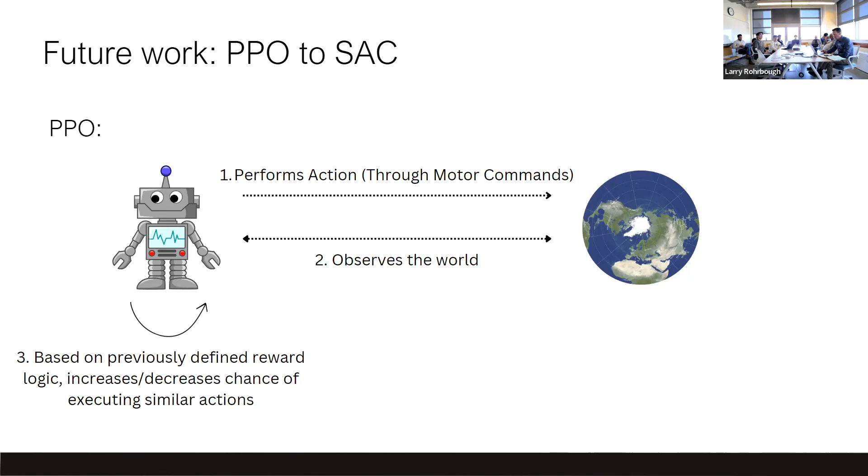Another future work is we are trying to change from PPO to SAC. As we talked about, we're currently using PPO to learn how to control the vehicle. Basically, PPO is an online reinforcement learning algorithm: each time the vehicle performs an action and observes the world, it updates its own policy based on that transition. Whereas SAC performs an action, observes the world, and then remembers the action and transition, similar to how memory works in the human brain. During training, it recalls some of those memories and tries to improve its current policy. That's one future direction we're going to head toward. SAC also has some technical advancements on exploration policies that we're not going to touch on today, but that's our plan for the future.

But if you add the memory, then you sacrifice the parallelization. Right, because if you have memory, you have to sacrifice two things. Number one is parallelization. Number two, if you have the memory, in engineering terms the memory sits in the CPU, so you increase swapping memory flow between the CPU and GPU, which further slows down training. So people prefer the on-policy version without memory, because GPUs are cheap — they sacrifice the memory by just running more agents on their own GPU cores to parallelize it. So SAC has its own drawbacks, unless there's some secret sauce I don't know about. But we can discuss that after.

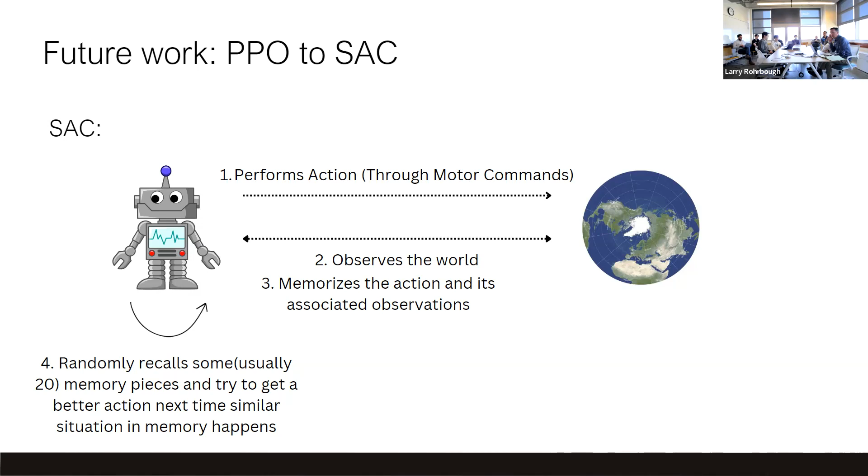Okay, nice job, guys. Great.

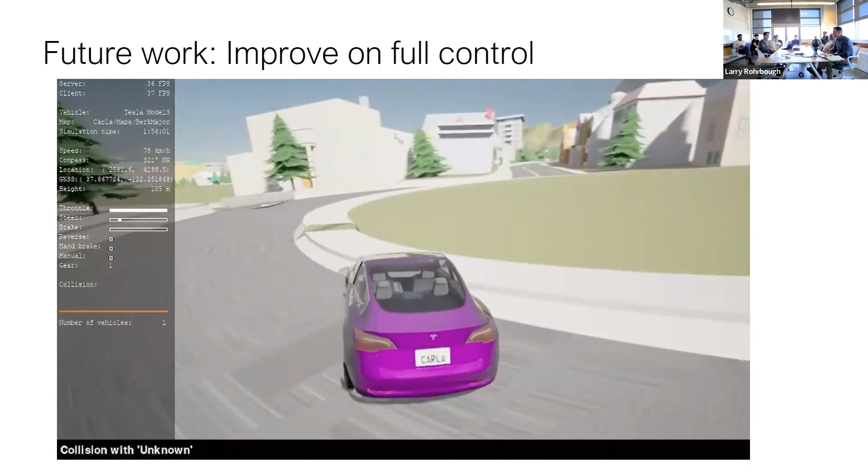So in conclusion, for now we are still improving on the full control. It learns to drive very fast, up to 200 miles per hour. However, it is hard for it to learn to brake while driving so fast, so we are still figuring out how to improve the convergence.

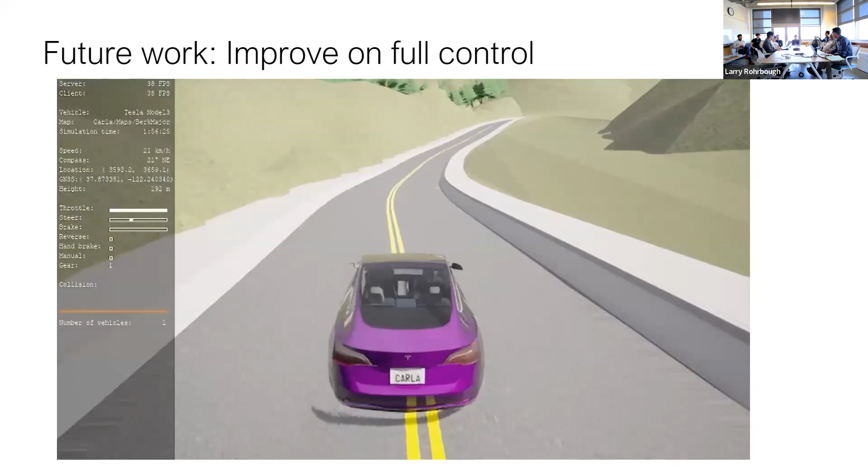Is the RL version going to be deployed on any hardware test? This is entirely in simulation — it's intended only to be in simulation. Oh, we have a go-kart at Richmond Field Station — we could actually test this and see if the go-kart can drive around Richmond Field Station, that would be fantastic. There's another group doing the go-kart drive-by-wire modification. The optimal solution is that we achieve driving around Richmond Field Station fully autonomously in the summer, so that's what the students are committed to do. But that's even longer.

Given that this is in Carla, we can also connect our tools to this. I mean, tools already interface to Carla — in fact, they are part of the official Carla release as well. But I think it's not just about testing and verification, it's also about training. We had a paper last year showing we can speed up RL training using Scenic. So I'd be happy to. Yeah, that's another thing that we... Yeah, absolutely, that would be very good. Yeah, that's also very much in the spirit of this program.

Yeah, I think we should — the consensus is that if we can represent rules in a more efficient, differentiable way, I think that would really be a breakthrough.

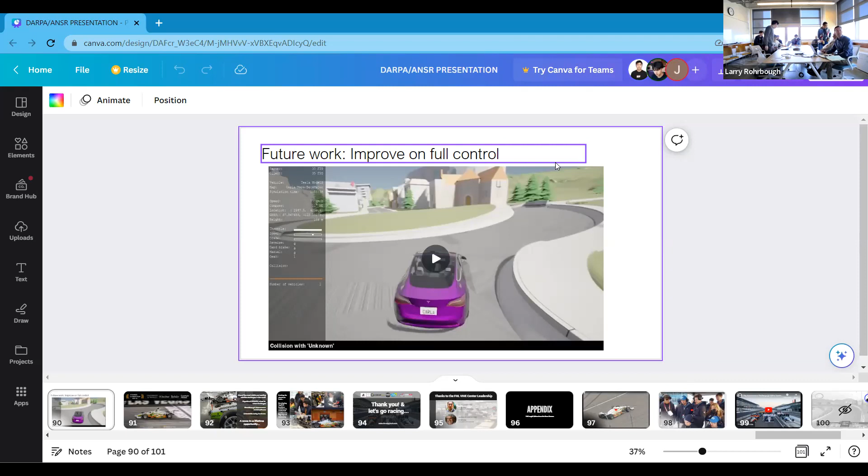Hey, just for your racing, you guys should take a trip to Monza. There's no sense handicapping yourself — go collect it, invest some money. We'll talk to Gary. Sorry, yes, you guys better go. Okay, thank you. Thank you, guys. Thank you.